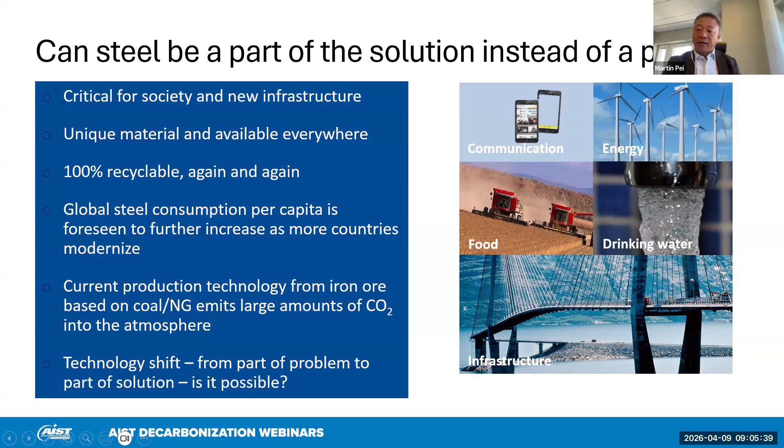Next slide, please. So back in 2016, we started the HYBRIT initiative as a research project in Sweden. We teamed up with partners, a mining company and an energy company, LKAB and Vattenfall. And we started to structure how we should run this research work.

So the critical questions we were thinking that we need to get an answer to: what would be the major differences in terms of reduction using pure hydrogen instead of natural gas, both thermodynamically and kinetically. How could we control this process? The second question, which is key, is how to control or manage the energy balance in the shaft furnace, as we are quite familiar with how we run on natural gas, but now we go over to hydrogen.

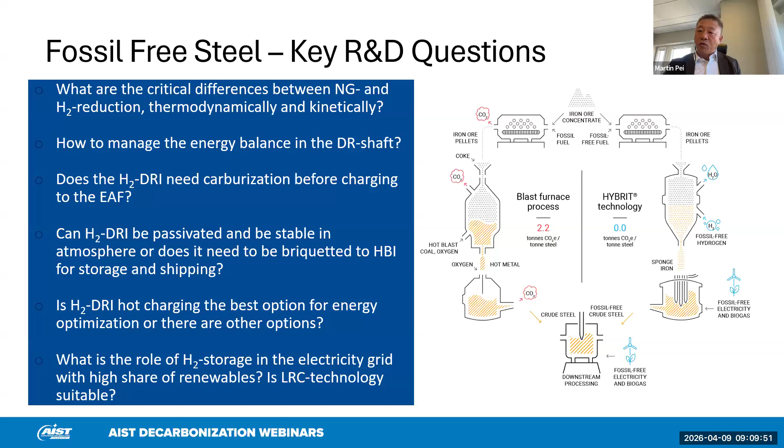Then finally, how can we integrate, say, hydrogen production using electrolysis with an electricity grid that is increasingly having more and more share of renewables? If we integrate hydrogen storage, what would be the best solution? Could the so-called lined rock cavern technology be used, because we use it today to store natural gas, whether that could be also repurposed. So these were the key questions that we thought we needed to get a clear answer to before we could move ahead at large scale. Next slide, please.

So now we started the research work, and I'll share a few of the major milestones, which most of you have probably read about in the past. One of the decisions we made, moving from a project to really a big investment program, was to create a joint venture company. So a joint venture company was created one year after we launched the project in 2017. HYBRIT Development AB was established with three owners.

And we moved ahead with a decision by our board and owners to invest in the pilot research program. In 2018, we started construction of the HYBRIT pilot plant, which you see in this photo, and that was commissioned in 2020. That was, of course, important. We managed it even though we were in the COVID pandemic time. We could commission this shaft furnace facility, electrolyzers, and essentially run the research program at this pilot scale.

One year later, we managed to successfully produce the first campaign where we could produce DRI using pure hydrogen. With that, we decided also to showcase that this could successfully be turned into steel. So we delivered plate products to one of our major customers, Volvo Group, who made this very nice truck you see on the right of this photo. This is an exciting product, their future fossil-free vehicle, in 2022.

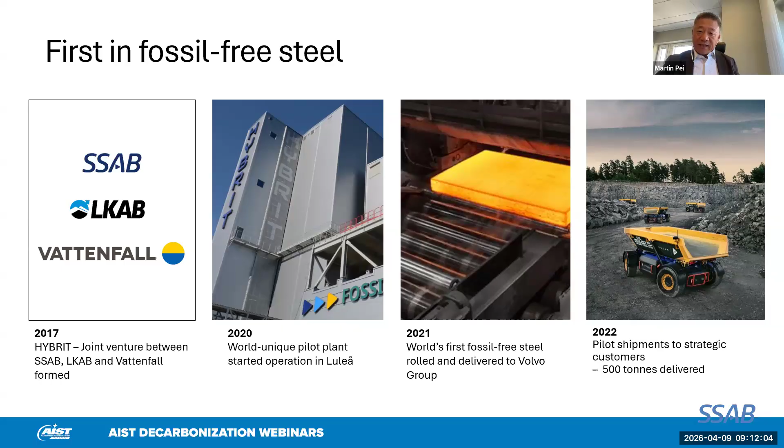One year later, SSAB decided to also launch a product from our US facility in Iowa, where we could showcase that we can use 100% recycled scrap using renewable natural gas and biocarbon instead of fossil fuels, and produce steel with Scope 1, Scope 2 emissions below 50 kilos per ton of steel. So we branded that SSAB Zero. This is a very good complement to what we already showcased with the HYBRIT fossil-free products.

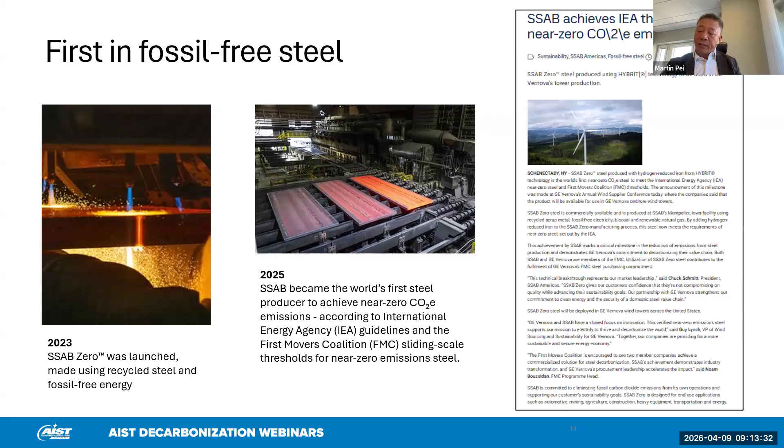And in 2025, last year, we could also certify that we can make steel with a certain percentage of HYBRIT DRI in this SSAB Zero product, making it possible to achieve the near zero emission steel standard launched by the First Movers Coalition, which is based on the International Energy Agency's guidelines. A good, important milestone for us as a company to be able to make the big investment decisions. Next slide, please.

Coming back to these highlights we have done, showcasing our journey. But what is most important is what has been done by the team at HYBRIT Development AB and the joint research program we have been running.

The aim of this is really to start from mining. Our partner mining company, LKAB, has a clear ambition to decarbonize their whole operation, including the pelletizing plant and sintering process to make these pellets. That was an important step.

And then, of course, the core part with our reduction with hydrogen integrated with electrolyzers and also the hydrogen storage. Then finally, the melting step in the electric furnace, whether this product can be successfully utilized. Next slide.

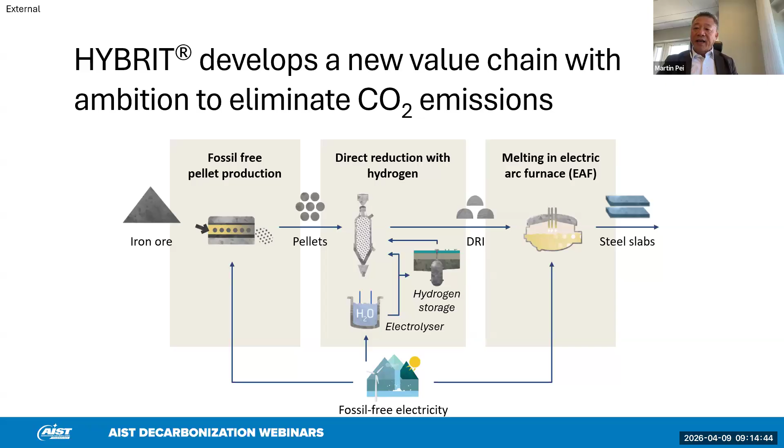Yes, the whole program is quite extensive. We built in some cases very large facilities, like the first photo here at one of LKAB's production facilities, where we established a bio-oil facility replacing fossil oil, and that has been successful in the fuel shift. This facility is now under normal use by LKAB after we finished this program. So essentially, it is possible to decarbonize the pellet sintering step.

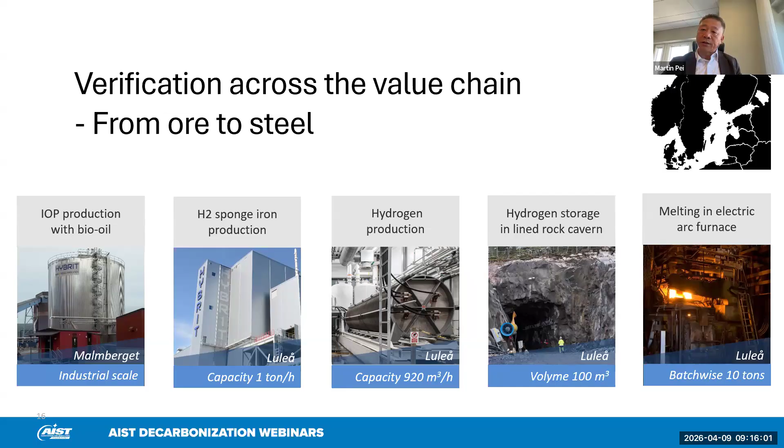And then the major investment went to the shaft furnace and also electrolyzer plant, including the hydrogen storage. All of these are in Luleå at the SSAB steel plant. And then finally, we utilize one of the existing pilot electric furnaces at Swerim, the research institute, formerly called MEFOS. This has created a very good opportunity for us to test this technology, all these major steps. Next slide.

Yeah, this pilot plant, of course, is the key part. And here we have put a lot of effort. Big investment has been put into this facility, which is extremely flexible, and we can make various experiments, tests, and run campaigns 24/7 for many weeks in this facility, studying different setups, parameters, and configurations. Next slide.

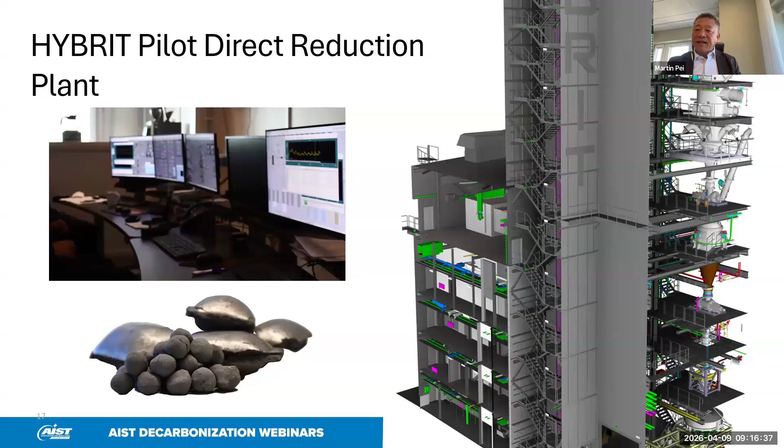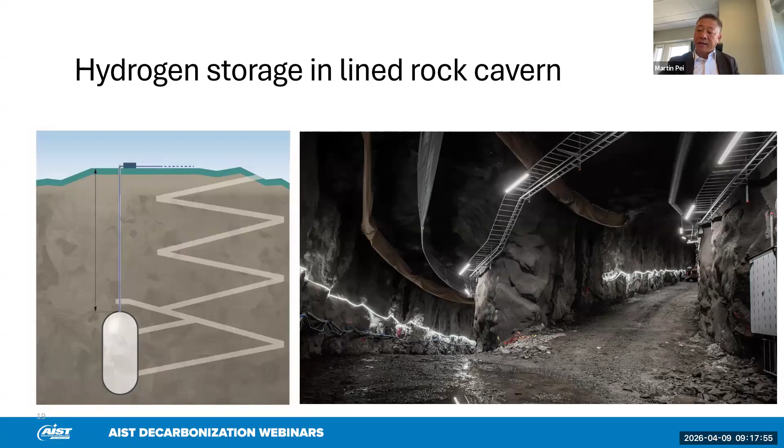So we compress hydrogen gas to 250 bars, and we can store hydrogen in this storage. This is integrated with the pilot plants. When we run, we can also utilize this storage. When we run the direct reduction campaigns, this becomes an extremely valuable backup in case there is any disturbance in the electrolyzer plant. We can get constant hydrogen supply to the shaft. Good. Next slide, please.

So the technology today runs very smoothly at this pilot scale, and we have been running campaigns since 2020, and we are still running campaigns today, continuing to study this process and further refine the settings and so on.

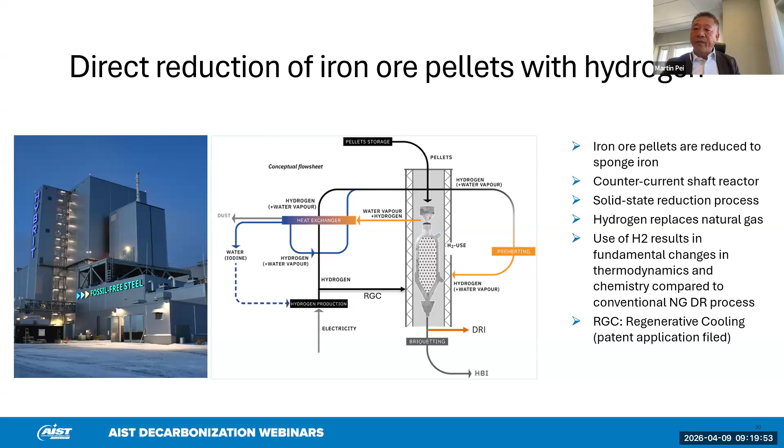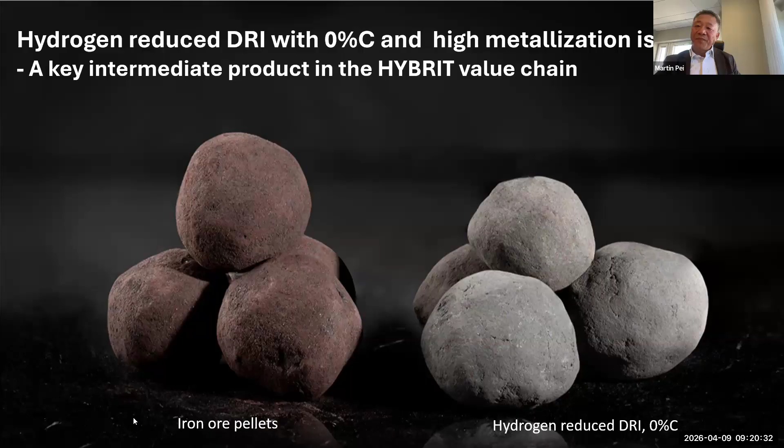A couple of major aspects, and this slide shows that this carbon-free high metallized DRI has extremely high mechanical strength. It is much stronger than the iron ore pellets that are charged into the shaft.

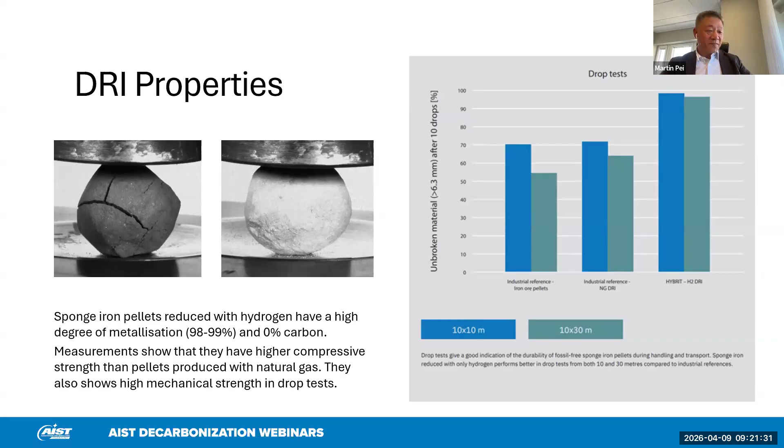Yes, from the research perspective, we have now established significant knowledge regarding how to run this process. We have today demonstrated that we can make steel using this technology, essentially eliminating all the fossil carbon dioxide emissions in the value chain from mining to steel. And the process settings are very well defined today, so we are quite confident this technology can be scaled up to a commercial scale.

And the program has been run really in a very good way. We manage all of this development work within budget, and essentially quicker than what we expected in the beginning, with the timeline that we planned for. And we now have quite a significant portfolio of patents that are now owned by the HYBRIT company.

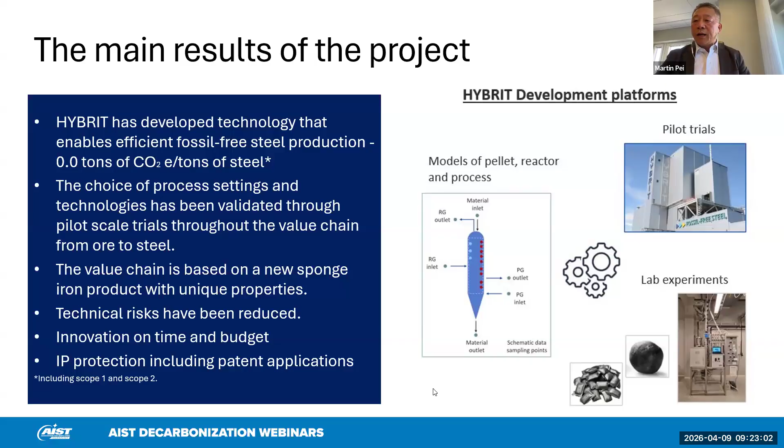And the hydrogen storage is also proven to be working very well, and it also provides significant benefits to the electricity grid under the conditions in northern Sweden. So this makes us confident that we could essentially decouple iron making from steel making, and we can handle, store and ship this DRI without losing energy efficiency. So this is an important conclusion we reached at SSAB.

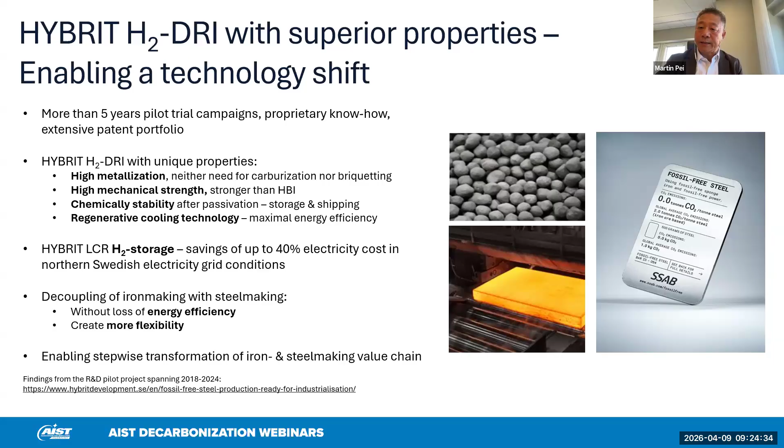Yes, now just showing what is happening in our company. So, next slide.

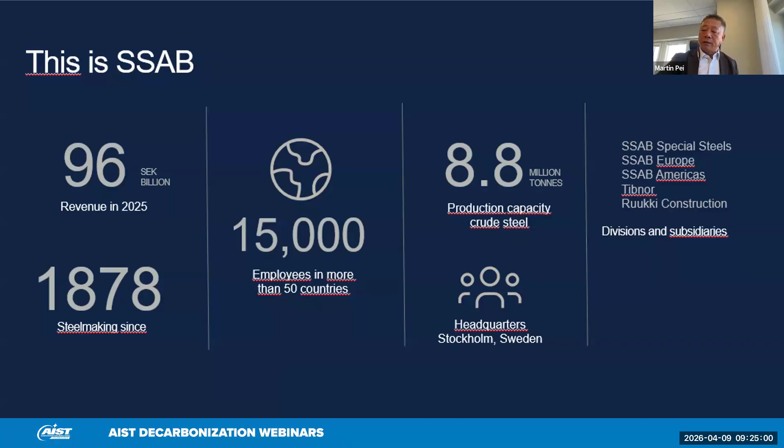Very quickly, for some of you who don't know SSAB, we are a steel company headquartered in Stockholm with around 9 million tons of steel production capacity. Next slide.

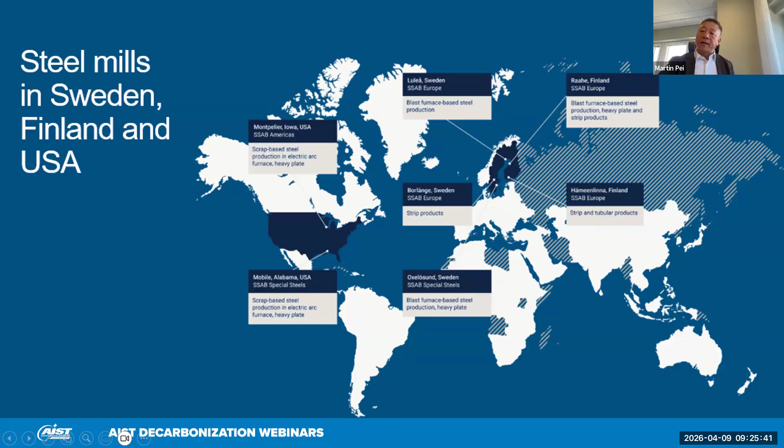Our major facilities: as I mentioned, we run two electric furnace mills in the U.S., one in Iowa, one in Alabama, where we produce heavy plate products. In the Nordic countries, we have production facilities in Sweden and Finland, mainly strip products. We also have two plate mills in the Nordic countries, one in Finland and one in Sweden, and three major sites with blast furnace operation, and this is where we are now making the investment to transform to fossil-free steelmaking. Next slide, please.

So currently there are two ongoing investment projects. The first step is in Oxelösund, the smaller one, where we are currently in the final installation stage of the melt shop - an electric furnace melt shop with 200 metric ton tap weight. This is going to be commissioned at the beginning of next year. Originally this was planned to be commissioned within 2026, but due to some delays with the electricity grid connection, it will now be commissioned at the beginning of next year.

And this is the first step. We will then shut down the blast furnace, coke oven plant, and the BOF shop, and go over to electric steelmaking. The second project, which is the major one, is a new mill currently under construction in Luleå, where we currently run the largest blast furnace. This is 2.5 million metric tons of strip products, quite a big investment, and that will be commissioned in 2029.

We have a principal decision that we will also transform our Finnish operation in Raahe. The decision is not yet finalized, but we have said that we will do a similar transformation as we did in Oxelösund. So we're working on this development decision, and hopefully it will come in the future. Next slide.

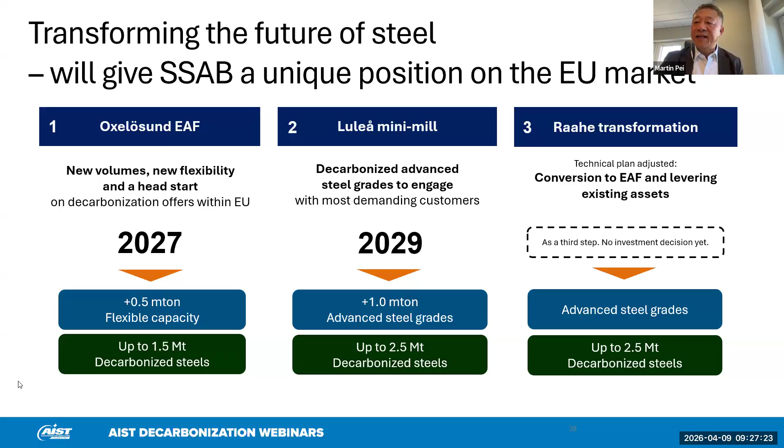Yeah, and this is, of course, very important that we have strategic customers that are engaged with this transformation, because this fossil-free steel, at least initially, will need to carry some premium in order to make the business case. We have currently more than 65 major customers that have entered into these strategic partnerships for our transformation.

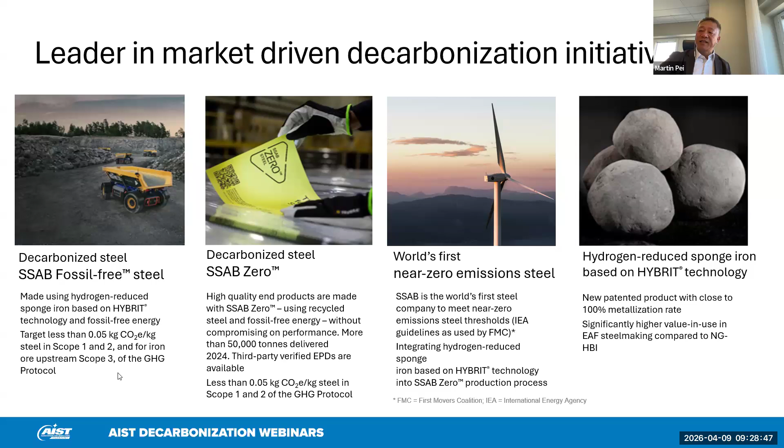Next. Yes, I think this is the final slide I prepared. So we have been promoting what we call SSAB fossil-free steel based on this superior HYBRIT hydrogen DRI. And then we have the SSAB zero products, initially only using recycled scrap, gradually also introducing partly DRI, this HYBRIT DRI into this product. And really, we are moving ahead with these investments, and hopefully this will take us to the fossil-free steel that we have decided to turn the company to.

So thank you very much for your attention. I'm happy to listen to Mike what would be the conclusion to use this product. Thank you.

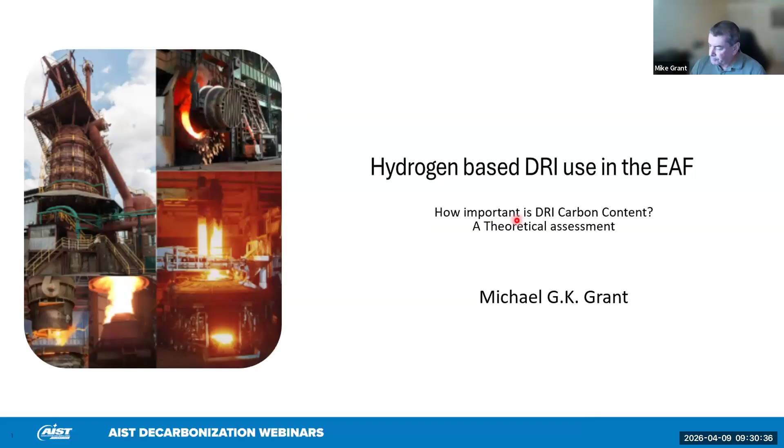Okay, so the title of the talk is Hydrogen-Based DRI Use in the Electric Arc Furnace, and it's answering a question that's been discussed quite a bit in the steel community about the importance of DRI carbon content. And today I'm going to provide you a theoretical assessment, and this complements Martin's presentation on the production and use of zero carbon DRI. So hopefully this will make some suggestions that we can talk about later.

You've all seen tables like this. The blast furnace is the big villain in today's society, producing 1.5 tons of CO2 per ton of steel produced. And this compares with 100% scrap-based electric arc furnace steelmaking, which is about 125 kilograms of CO2 per ton. These are direct emissions, emissions from the process itself. And we could look also over at the hydrogen-based DRI process with the EAF at around roughly the same amount of emissions. So both methods for producing steel reduce CO2 emissions by about 90%, scope one, and certainly these are the obvious choices for future steel making, low carbon steel making.

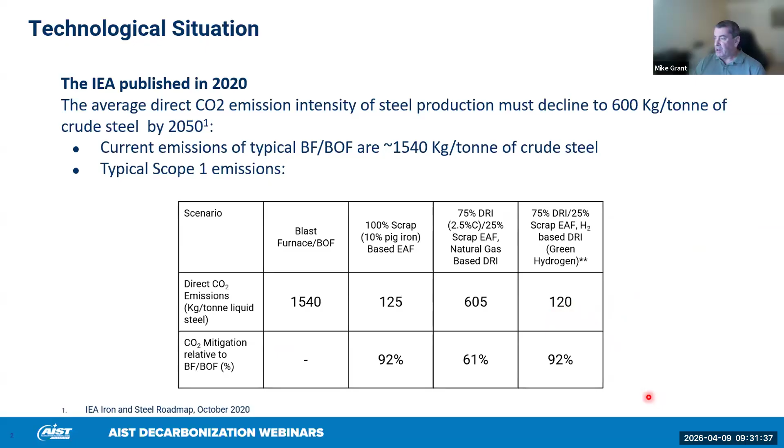Now, why do we use DRI? People will say, well, scrap and 100% hydrogen-based DRI are similar. We all know that scrap contains impurities, and we call them residuals. The amount of residuals present in the scrap, if that melts into the steel, can limit the kind of steel that's being made. So, for example, for producing high-quality exposed auto sheet, the limitations for the amount of residuals that you can melt in is quite low. And therefore, given the types of scrap that's available on the market, quite often you have to dilute this scrap with ore-based metallics such as DRI or pig iron. In fact, this is absolutely necessary when making exposed auto sheet.

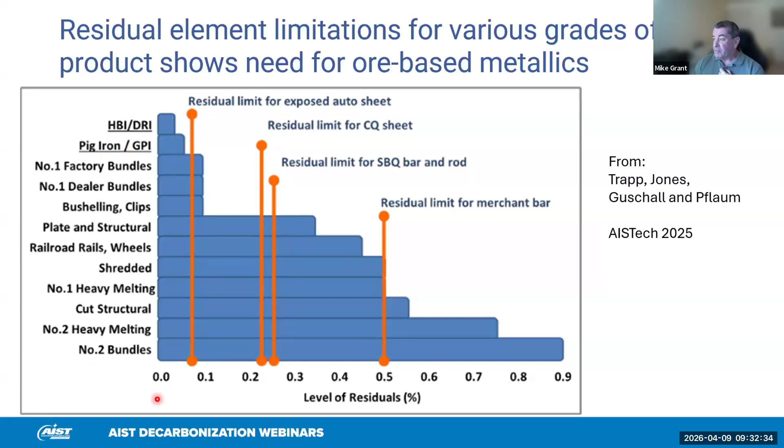So in effect, we're using the DRI to dilute the tramp elements. Copper is the big one that we're trying to reduce. It can eliminate almost all your tramp elements if 100% DRI is used. Cheaper scrap can be used if we mix it with DRI, but in the end, we want to make high quality steel. And with decarbonization trending towards more and more EAF production, there's going to be a lot of competition for high quality scrap, and DRI is going to need to be available to replace that scrap that's being sought after.

Pig iron, of course, is an ore-based metallic as well. That's currently widely used in the electric arc furnace. But again, that's made with a blast furnace with a high CO2 footprint. And since we're trying to reduce our CO2 emissions, pig iron will probably be phased out as well. Now, there are challenges with DRI, especially with low metallization. Martin mentioned 99% metallization for hydrogen-based DRI. Typical commodity-based DRI is around 94% metallization. Many of these DRIs have relatively low carbon content, so the yield and productivity of the electric arc furnace is reduced, whether using high metallized DRI or low metallized DRI.

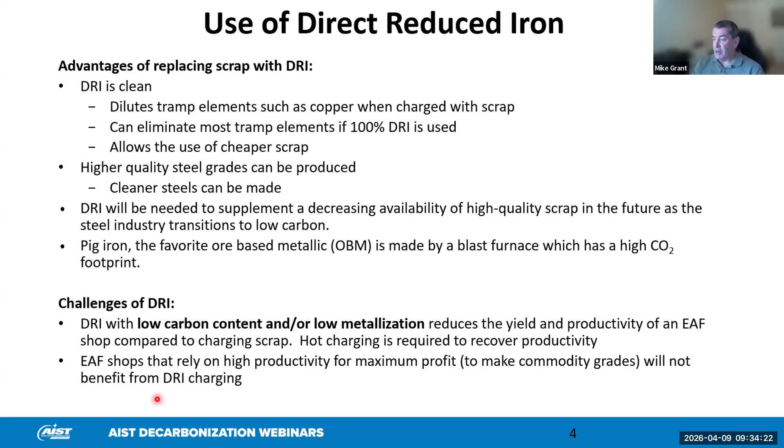With the reduction in productivity, if you can build your DRI plant next to the EAF, hot charging is required to recover productivity.

We can't escape the fact that steel is an iron-carbon alloy, so carbon plays a role no matter what. Looking at the three main processes for producing steel, the electric arc furnace, the BOF, and the bottom blown OBM, as we blow our carbon down to a low carbon content of 0.05%, we oxidize quite a bit of our raw material, our scrap, our metallic iron. A typical 0.05% carbon tap heat can put about 40% FeO in the slag. It's less for the BOF and even less for bottom blowing, because these vessels mix the steel much more rigorously. There's not the gradients you have in the electric arc furnace, where all the energy goes in at the top, heating the top with oxygen and with the arc. So there's very little convection taking place. You have cold, high carbon steel at the bottom and very low carbon, high oxygen steel at the top, coupled with a slag that produces a high FeO content, and this is yield loss.

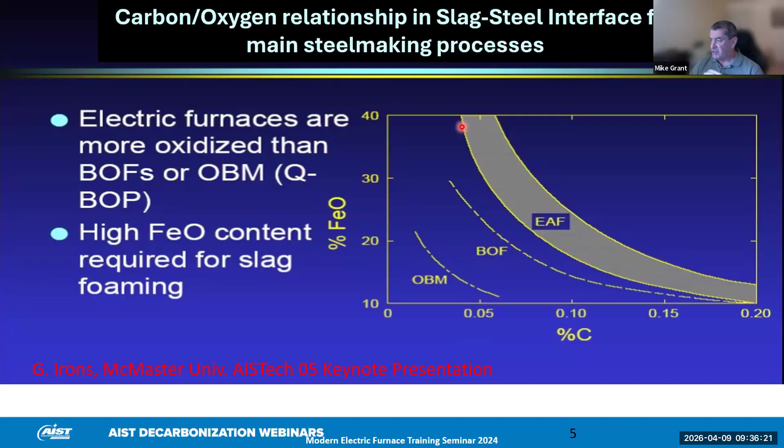I'm showing this diagram because it plays into some of the assumptions I make later on. All the heats I'm simulating assume 40% FeO content in the slag, 0.05 weight percent carbon tap, and each heat is 50% DRI, 50% scrap. We're charging exactly the same number of atoms at the beginning into the furnace, and we're tapping the exact same number of atoms when we tap. We can do this as a theoretical exercise, but the purpose is to show the effect of how we balance the carbon and oxygen to maintain exactly the same yield. It's theoretical, but always good to know for evaluating these cases.

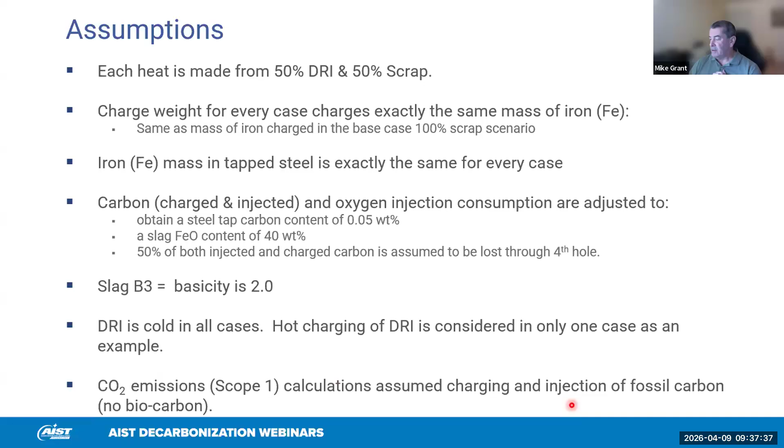All the DRI is cold, except for one example where we do a hot charging calculation just to show the benefits of hot charging. I did not assume any biocarbon in these simulations, only fossil carbon. But even so, with fossil carbon, the emissions aren't too high.

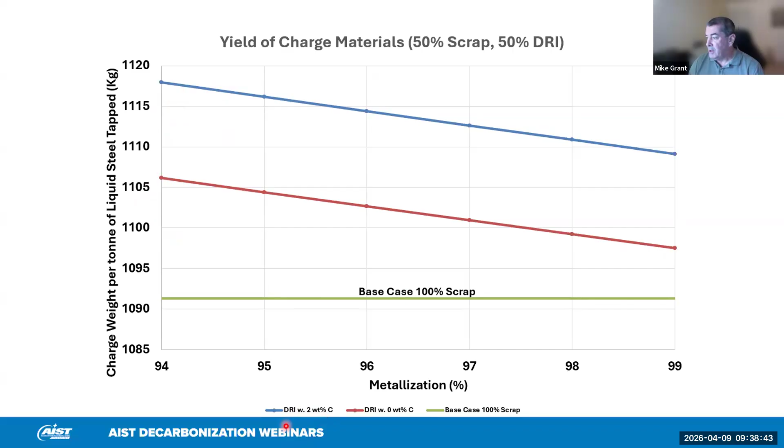This shows the amount of material you need to charge into the furnace to get 1,000 kilograms of steel out of the tap. A highly metallized DRI has much more metallic iron in it, much less oxygen, so the total weight you charge could be much lower compared to 94% metallized, where you have a lot of iron oxide, FeO, in the DRI product. To make up for that oxygen contained in your DRI, you have to increase the weight of the charge. This is a pretty simple principle. If we have 2% carbon, as in this comparison, we see the charge weight is even higher compared to the 100% scrap case.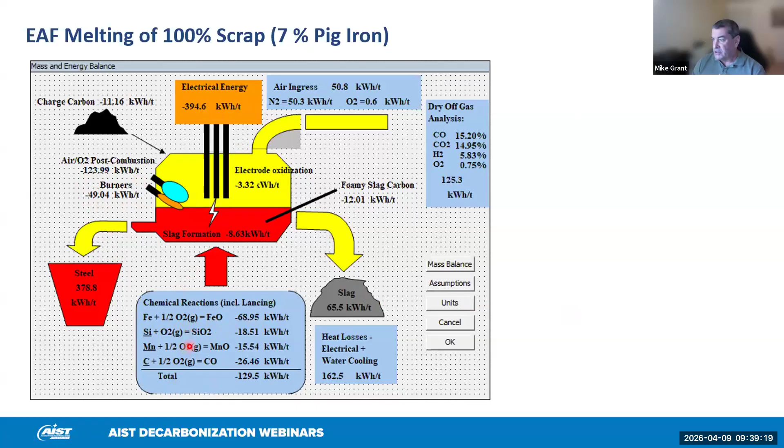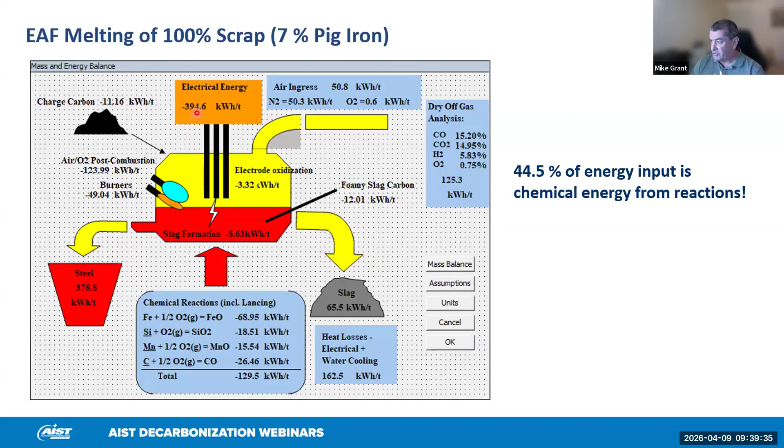All the calculations were based on a reference of 100% scrap, about 395 kilowatt hours per ton of electrical energy consumption. This diagram shows all the different energies produced from the different reactions with oxygen and carbon. We have burners, post-combustion, and bath reactions, all contributing to the energy for the whole process. The chemical energy actually makes up about 45% of the entire process energy. Electrical energy makes up the other half, but that's the one we always pay the most attention to. So this is the reference.

Looking at the different cases, comparing 0% carbon DRI with 2% carbon DRI, starting with low metallization all the way up to high metallization, you can see the higher the metallization, the lower the power consumption, or the higher the productivity of the electric arc furnace, compared with the 100% scrap case. Looking at CO2 emissions, because we're charging less carbon in the process, we produce less CO2, around 25 to 45% lower CO2 emissions when we charge zero carbon DRI. So there's that benefit alone, despite consuming a little more energy and not having carbon in your process.

Natural gas-based DRI puts carbon in the DRI, which theoretically shows it has benefits, but in reality, natural gas-based DRI is very difficult or expensive to go much above 96% metallization.

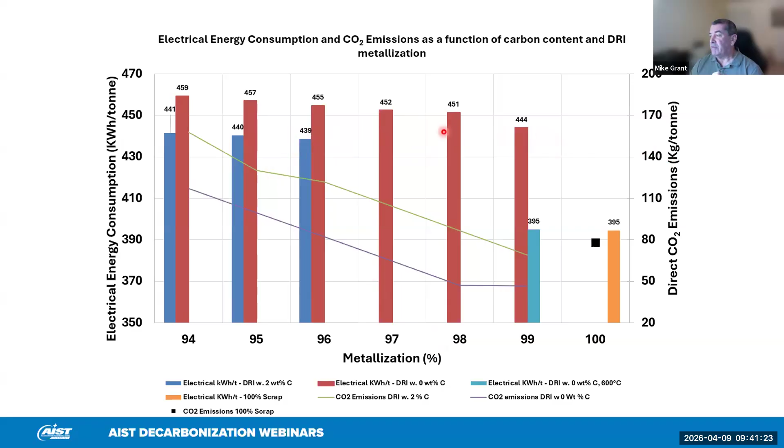As Martin explained, 99% metallization is very achievable with hydrogen-based DRI. So really, when we're comparing carbon-based DRI with hydrogen-based DRI, you compare 99% with 96%, and you can see here that theoretically there's about a 5 kilowatt hour per ton difference. This falls well within the normal heat-to-heat variability, so essentially this small difference you might not even notice when comparing the two.

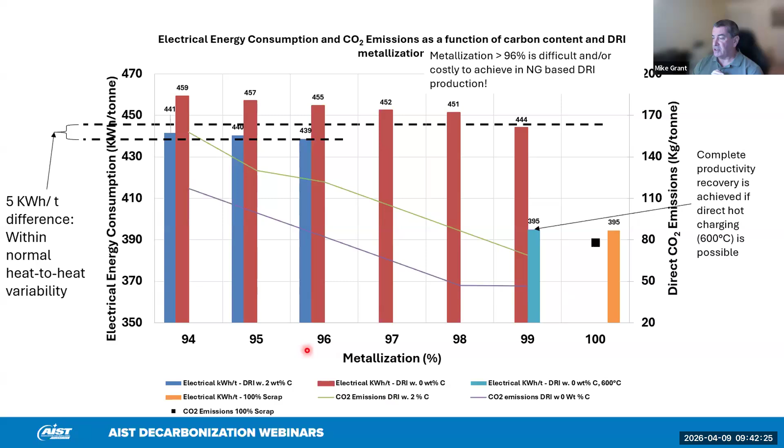If you are able to hot charge your DRI, we can go to 600 degrees C. We can bring that electrical power consumption down to the equivalent of what we had for the reference case with scrap, and this will recover all of the productivity lost through the use of DRI in the system. So in reality, the zero carbon DRI with high metallization is effectively as good as 96% metallized DRI with 2% carbon.

So, of course, there's been a big debate on the importance of carbon in DRI. Keep in mind that the carbon in DRI comes in the form of iron carbide, and iron carbide doesn't melt -- it dissolves. So from a melting point perspective, it doesn't really help so much.

The secret is to charge the DRI continuously at a rate that it could effectively be melted by the arc. The carbon, of course, improves the yield. It makes the slag foam better, and the reason for that is because it diminishes the need for extra control with your carbon and oxygen balance. So in effect, if you're putting carbon in the DRI, you don't need to charge as much carbon or inject as much foamy slag carbon.

Keep in mind, though, that injection carbon in traditional conventional systems is about 50% efficient. We lose about 50% in the fourth hole due to the negative pressure inside the electric arc furnace -- it drags a lot of the injection carbon out, and we lose a lot of that. But with a higher metallized zero carbon DRI, we need to have a carbon injection system that is well controlled and high efficiency. So 50% efficient, as in traditional carbon injection systems, is not good enough. We need to go higher.

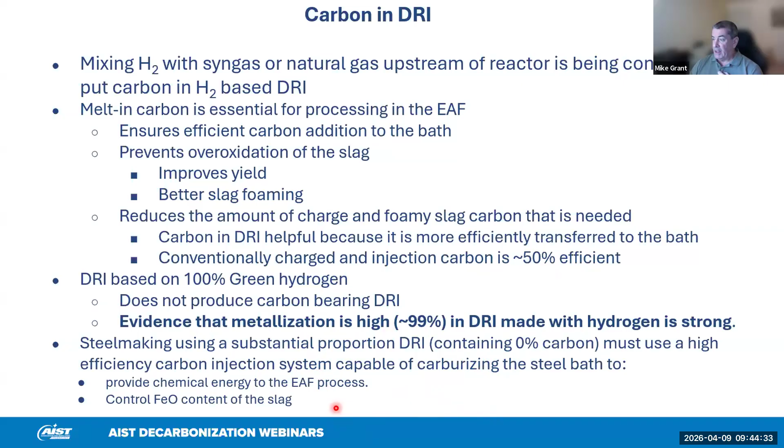The amount of carbon, of course, depends on the metallization of the DRI that you're charging. So I've calculated the amount of carbon that needs to be charged in each case, depending on the metallization. With 94 percent metallization, we need about 25 kilograms of carbon per ton of steel just to control the FeO in the slag, reducing that FeO back to iron so that we can recover that metal. And of course, these are emissions.

As we increase the quality of the DRI, we approach 99% metallization, the amount of carbon that we need to inject comes down a lot because we need to reduce a lot less FeO.

One problem with such low carbon injection rates is it's pretty hard to control. Practically, it's pretty hard to control the injection rate of carbon at this low consumption value, given the fact that with a conventional carbon injection system, you're losing 50%. So it's really hard to know what you're putting into the process anyway. But this is going to be a topic that needs to be dealt with as we move towards more hydrogen-based DRI.

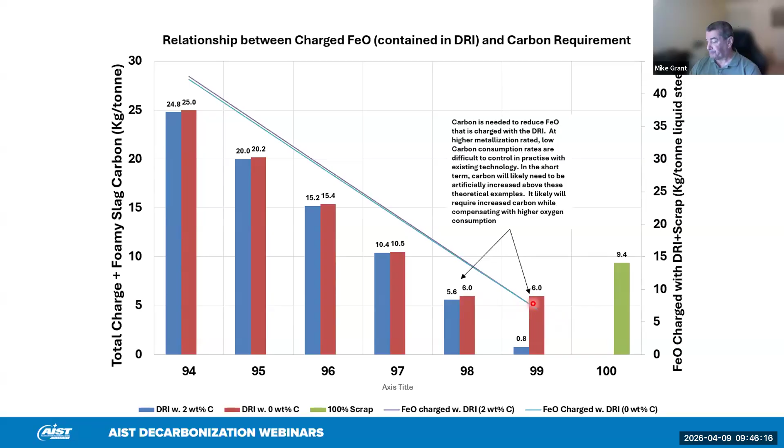There are companies now working on improving the efficiency. Tallman Technologies is an example -- they use a supersonic shroud to kind of encase the stream, and they've gone from about 40 to 60% efficient up to about 95% or greater. This even helps for biocarbon injection. Biocarbon being notoriously very bad, low density, very hard to inject -- you lose a lot more in the fourth hole. Apparently, this also works very well with biochar.

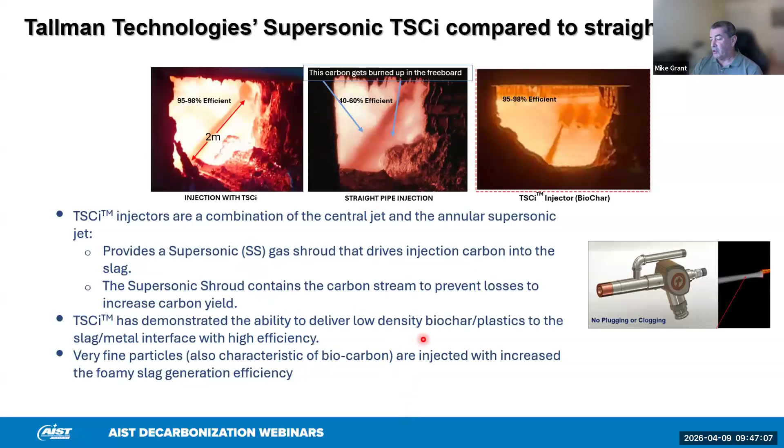So there are companies out there working on this. The more efficient you have, the more you can control it, the more you know how much carbon you're putting in the system, and you can balance that with oxygen.

So just to wrap up, hydrogen-based DRI, we demonstrate, at least on the theoretical level, it's effectively the same as high carbon 96% metallized DRI. And the question is how do we control the carbon and how do we control the oxygen so that we don't lose too much of our iron in the form of FeO.

Really, up till now, carbon injection is more of an afterthought in most EAF operations. It's not considered to be an essential tool. So what happens is the carbon injection is judged based on whether the slag foams or not. In fact, if you can control the FeO content in your slag, you can control the foaming, and this means precise control of carbon injection and oxygen injection to balance.

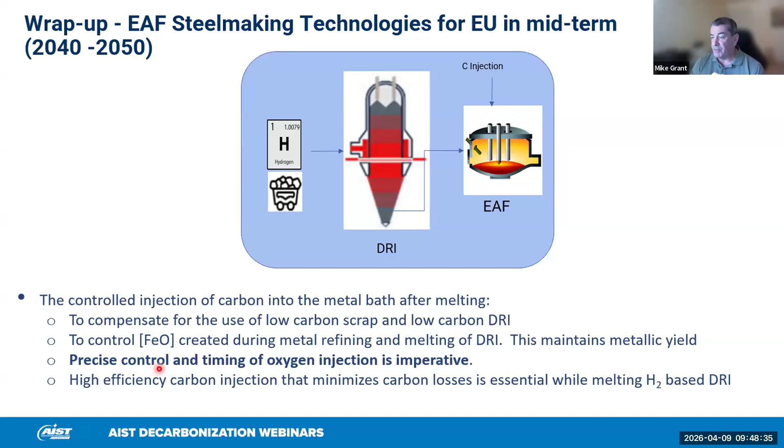And with that, I think that concludes my presentation. Thank you very much, it's a pleasure talking to you.